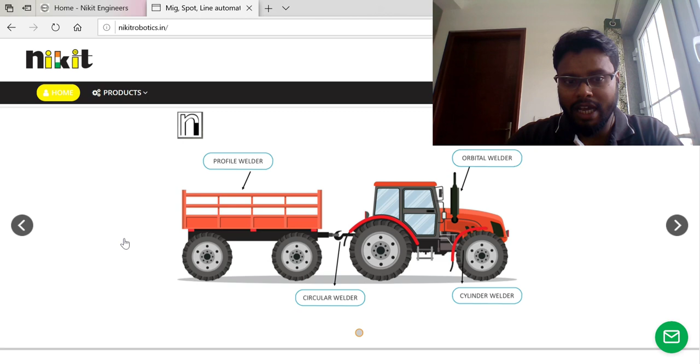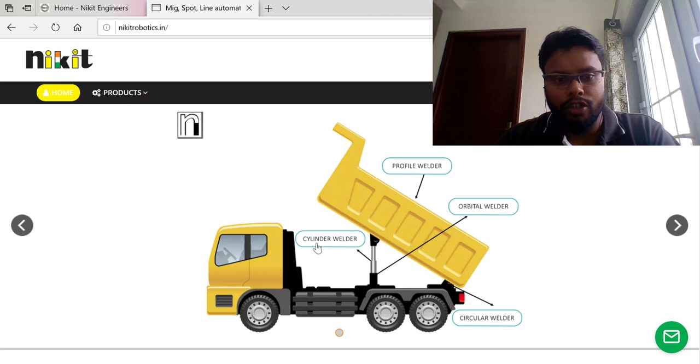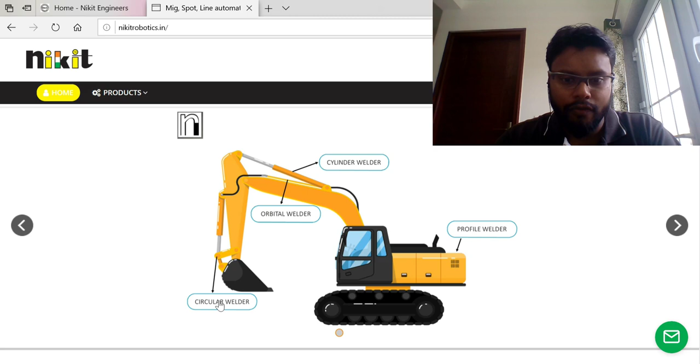Talking about orbital welders, all your boom and hydraulic cylinders need connecting tubes which are welded on our orbital welders. And for starters, we have a very small product called the circular welder, where rod eyes and pivot joints can be welded through it. These are the four products, guys.

If you get into much detail, we've given the same kind of intro, and that's there on Nikit Engineers, because this is a subsidiary of Nikit Engineers. We're not trying to put forth a completely new platform. Scrolling down in regards to the product.

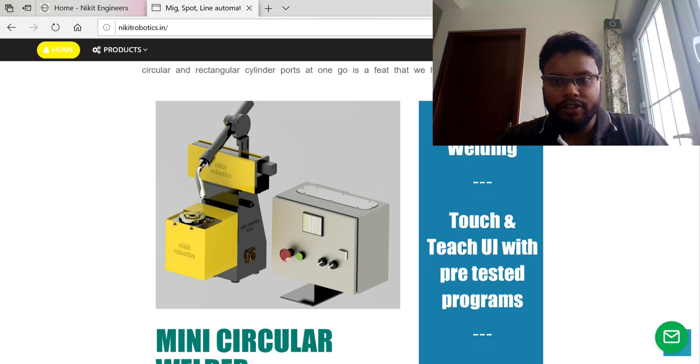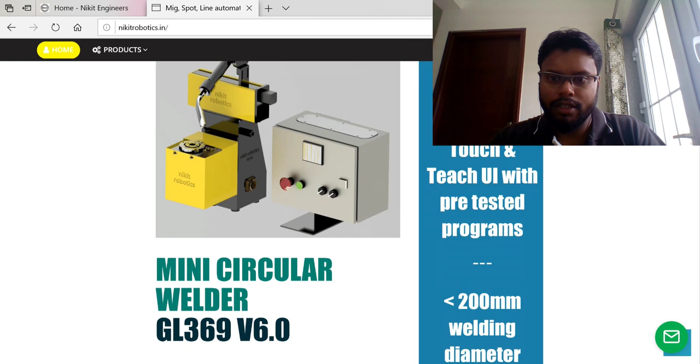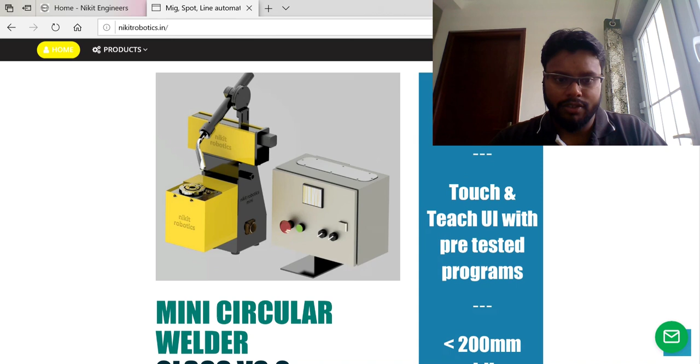This is a recent product we've launched, a circular welder or mini circular welder, where things are really good. It does circular welding applications, and it's got a touch and teach user interface with pre-tested programs. It takes up to less than 200mm welding diameter, and you won't believe the price, guys, it starts from 99,999 plus taxes. It's available right away, you can start booking these things, and all you've got to do is, it comes with the torch, just connect your welding systems.

Now going back to the next product, this is a cylinder welder.

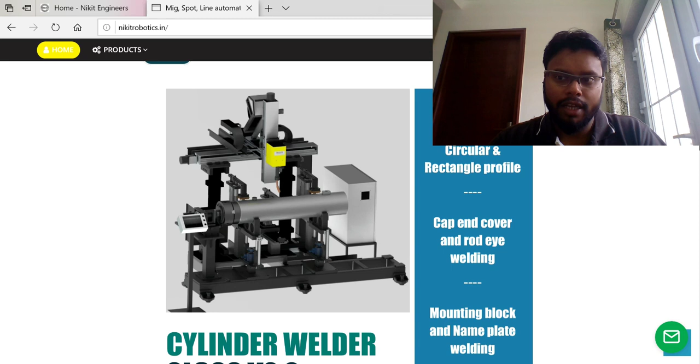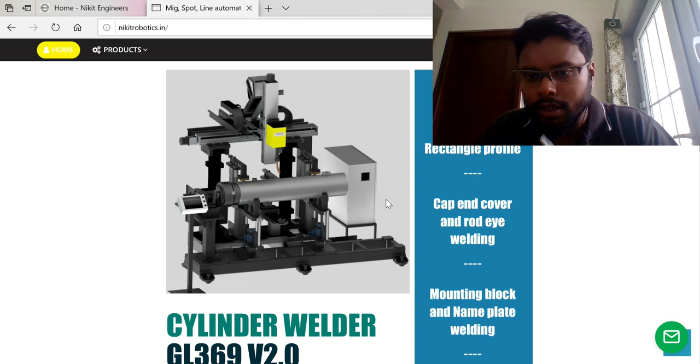Guys, this machine, or all the machines on our platform, are equipped or modified with one major technology which we are focusing on right now: the intelligentized welding manufacturing control systems.

This is the next big thing in welding, guys, because in intelligentized welding manufacturing, every product or every part that is loaded onto the system and gets welded goes through a process where, during the course of welding, if there is a small delay or a small mishap where the welding stops or your component goes for a toss, the system records it and gives this data to the customer, saying what has happened all through the day, week, or month. The entire data is stored, pointing out where the mishap happened, how it happened, and what kind of input outputs have been stopped.

Basically giving a closed loop system or complete data for the owners to understand how their operators are working on the system, how the machine is behaving based on the operator, and what kind of inputs are being fed into the system. So this is going to be the next big standard for all kinds of automation relative to welding.

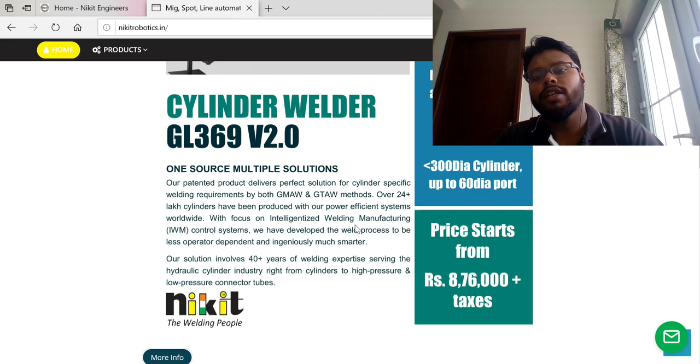Let's move back to our hydraulic connector tubes. Basically what I showed you here, guys, is the connector tubes welding. The connector tubes are being done on our orbital system, which again has a patent pending application that's going around.

Now these tubes are the biggest challenge for any hydraulic industries, because these tubes go through a pressure of 350 to about 800 bar. But the biggest challenge is that it's not consistent — the pressures are sudden thrust pressures, due to which there are extreme chances of weld crack or the entire tube getting ruptured at the weld zone.

To avoid this, what we have designed is a system called an orbital welder. Basically, the entire torch system rotates around the weld joint and creates a weld bead. The weld bead we have developed here is called the Uranami weld bead. What you look at, guys, this is the thing — the Uranami weld bead.

Yeah, you saw it right — it withstands up to 1500 bar pressure test, and this has been proven out. This is currently being used for connecting tubes in Tata Hitachi excavators.

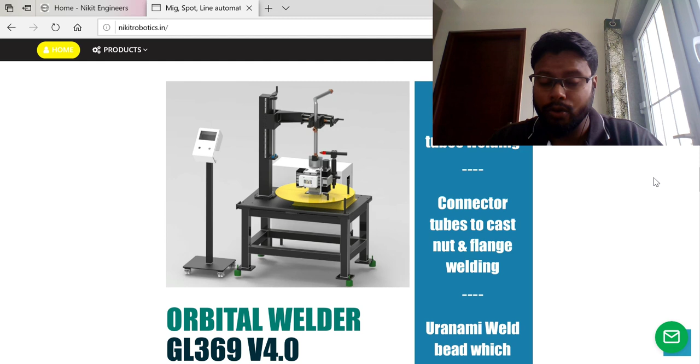Now, what's the big technology about the Uranami weld bead? It's not a big technology, guys, but there's a huge process involved — how we generate this particular bead, the kind of weld arrangement, the kind of current parameter settings. But let's talk about it in detail in our Uranami video, where we'll take you through the complete project, how we've developed it, how the component has come out, and what kind of advantage you've got.

Moving on to the next system, we have the profile welder. Basically, it welds different kinds of profiles — let it be circular, let it be linear, let it be curvature. You name the profile, you just directly start teaching it, and it starts welding. It's required for most of your sheet metal boxes or fabricated structures.

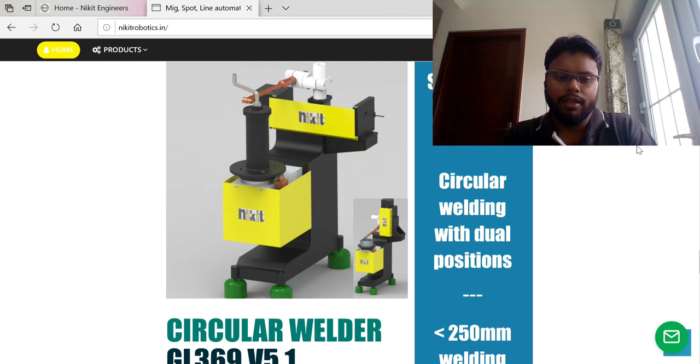Here's another product, the circular welder. This was our first model where we initiated a circular welder for a very low budget application, but we managed to pull it off at 1.99 lakhs because it's got a whole lot of configurations. It's a much bigger model than the mini circular one — it takes up to 250 mm and the load rating is also much higher, going up to 6 to 10 kgs payload, whereas the mini circular welder has only about less than 3 kgs payload.

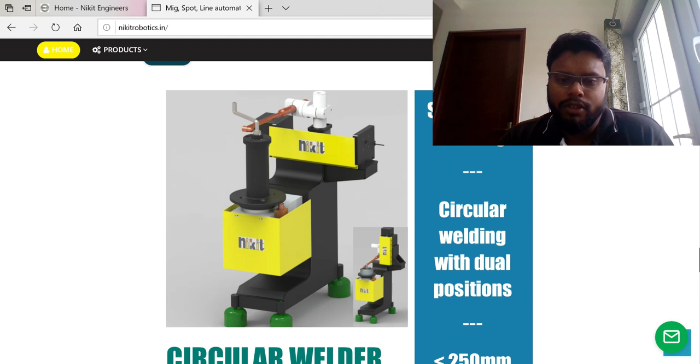And these are the basic machines that we are running across.